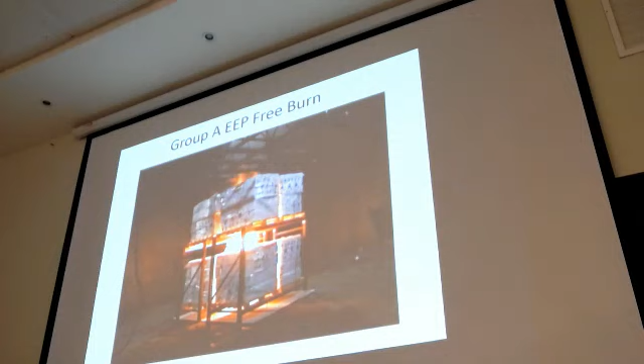We have no sprinkler discharge against this fire. It only takes a few moments before it's fully involved. These types of plastic are a petroleum product. It is virtually a solid gasoline, if you will, with an oxidizer in the foam cells to add to the combustion process.

Incendio grande, huh? No translation? Okay.

During the test process, they will spray water around the perimeter. You will see the floor being a little wet. This is just so we channel the heat up through the calorimeter and we don't get any heat escaping out of the sides of the test facility.

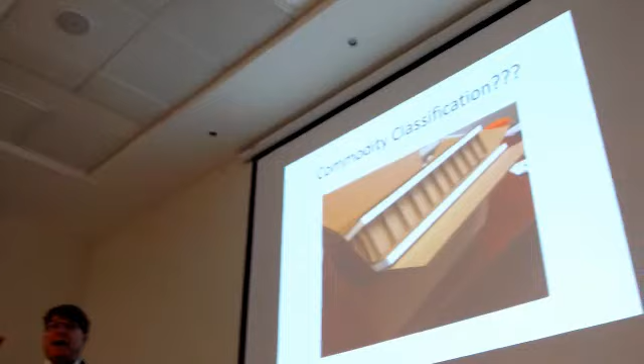Today, fire sprinklers with glass bulbs have an unexpanded plastic protective strap, and we ship them with this expanded polystyrene plate as a shock absorber to keep them safe. We manufacture very high quality sprinklers, but it doesn't do us any good if we can't get this quality validated product in our customers' hands in the same condition it leaves the factory.

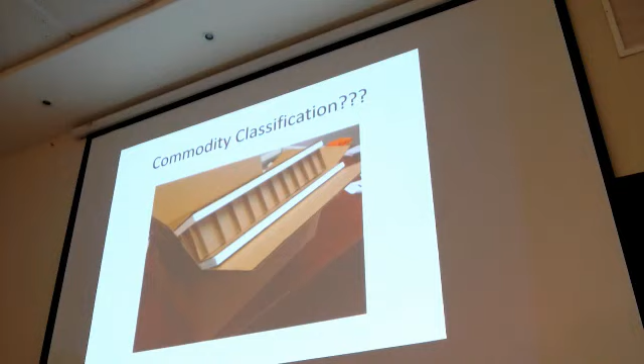So changing our packaging has changed our commodity classification. These polystyrene plates represent 14% by volume expanded plastic. So now a box of fire sprinklers is considered a cartoned unexpanded plastic. The same product inside, but the packaging has forced this. So we need to think of everything that's in the box, not just the product.

Changes in industrial practices occurred throughout the world after World War II. We began building buildings out of steel. Steel was stronger, lighter, more economical, and we could go taller with our buildings. We were allowed to begin using fork trucks to mechanically move pallets, and we could go much taller than with a human and a ladder. This added that vertical component.

But we didn't change our sprinkler systems, and this is what a fire looked like after we started doing this with a typical antiquated sprinkler system, a pipe schedule sprinkler system with half-inch sprinklers.

So in the 1950s, from these catastrophic losses, we began to develop direction to our sprinklers, a standard spray upright or a standard spray pendant. We also developed a sidewall, but it's the uprights and pendants direction that gave us better performance for protecting storage occupancies.

But still, in the 1950s, with this technology, our fire tests would open many more sprinklers than our water supply could handle. So again, we needed the next generation of improvement to our design, or a performance-based design.

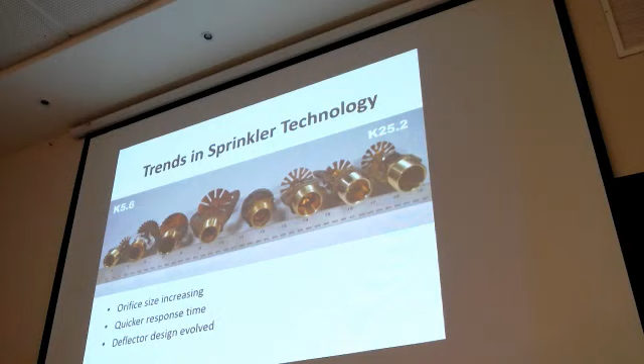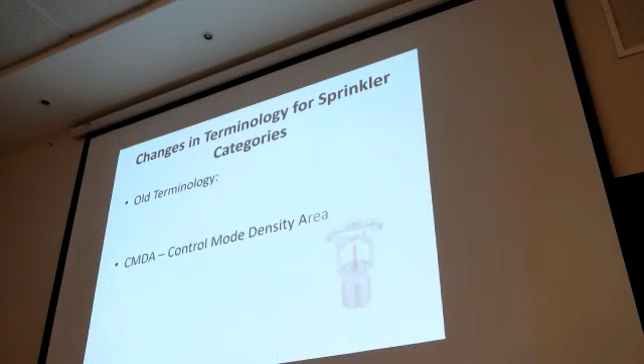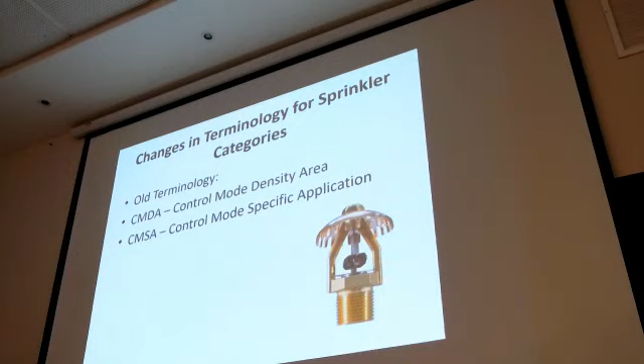So now we need an improvement in our terminology, or the names that we call sprinklers. We originally had the control mode density area from the 1960s, and we had control mode specific application, the first time we used a pressure and a number or quantity of sprinklers as our design criteria. And we have suppression mode sprinklers.

Now it's getting more complicated. You have a building with storage in it. Which one do you select? Which one do you choose?

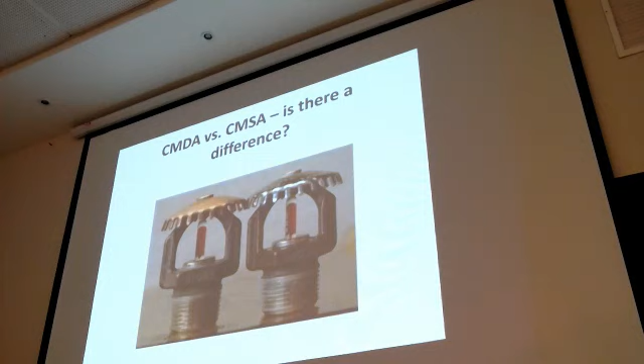So FM Global began doing research on the differences, or really the similarities between sprinklers. Are control mode density area sprinklers equivalent to a control mode specific application sprinkler if their properties or their attributes are identical? We can see by this photograph, the sprinkler on the left is control mode density area. It looks nearly identical to the control mode specific application sprinkler. The only difference is the chrome on the deflector, which is just there to identify the sprinkler as being special.

But because their K factors are the same, their temperatures are the same, the response time of the bulbs are the same, the deflectors are the same - it's those properties that define the performance characteristics of the sprinkler. If the properties are equivalent, the sprinklers are equivalent. This holds true if you are comparing a Tyco sprinkler to a Viking sprinkler to a Reliable sprinkler. If these properties or attributes are equivalent, then the sprinklers are equivalent in performance and can be used interchangeably.

So FM did a full-scale fire test comparison, 16 total tests, but 8 side-by-side comparisons, always with double row racks, class 2 to standard plastics, K11.2 upright, nominal 160, standard response. And at the end of the day, each one of these tests cost $100,000 plus - nearly $2 million was spent to determine this.

And the conclusion of the test is that they're equivalent for design purposes, provided that K factor, orientation, temperature, RTI or response time index, and the spacing of the sprinklers are identical. This was a quantum leap in moving our industry forward and innovating and simplifying how we do our designs for protecting storage. So now all these cumbersome names have just evolved into a sprinkler category called storage sprinklers.

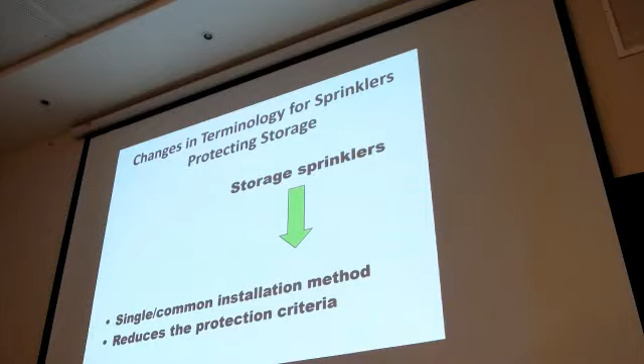Use a single common installation method, and it reduces the protection criteria, simplifies the design aspect for the engineer. The key attribute, like I said earlier, is to take the water from here and get it down to the floor against the products of combustion that are fighting us so hard in getting the water down where it needs to be. So the number one thing to look at is the K factor.

We have evolved from the half inch, 5.6, up to the 1 inch, 25.2. The response time index is extremely important. You can see here close-ups of a standard response link - very thick, it's heavy, it's got high thermal mass. Our quick response or fast response thermal element is very thin, has a very low thermal mass.

Same attributes occur with bulb sprinklers. This is the 3 millimeter diameter bulb on the left, 5 millimeter diameter bulb on the right. We have quick response on the left and standard response on the right.

So orientation is simple, things we've known for many years - pendant sprinklers and upright sprinklers. Pendant sprinklers have a slight advantage over upright sprinklers. If you look in the tables for upright ESFR, you see that sometimes their height is very limited. Where with a pendant sprinkler, we can go up to the very tall limits of ceiling-only protection.

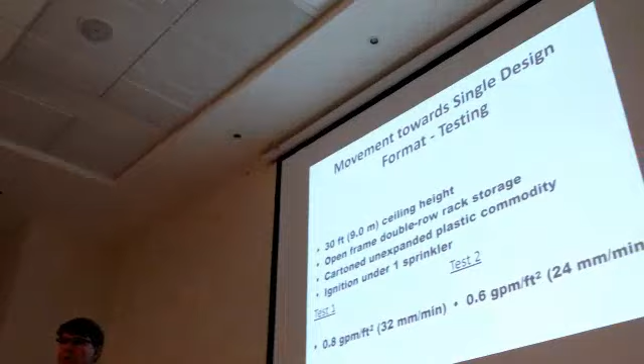So in test number 1, we deliver a 0.8 density. This is an enormous quantity of water. If we were to put a dam up at the spacing of this sprinkler, in 1 minute's time, the water on the floor would be well above our ankle, halfway up to our knee. A very large quantity of water.

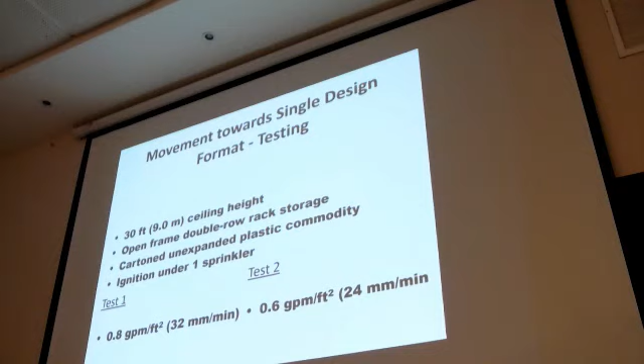Test number 2, with our new technology and new thought process of designing the droplet size, we will deliberately reduce the total water delivered by 25%, down to a 0.60 gallons per minute density. And we asked how many sprinklers will open in each fire. This is test number 1.

Please note, the igniters are being lit. This is an FM Global test. We have ignition. 8-foot aisle, 20 feet of storage, 30-foot ceiling height.

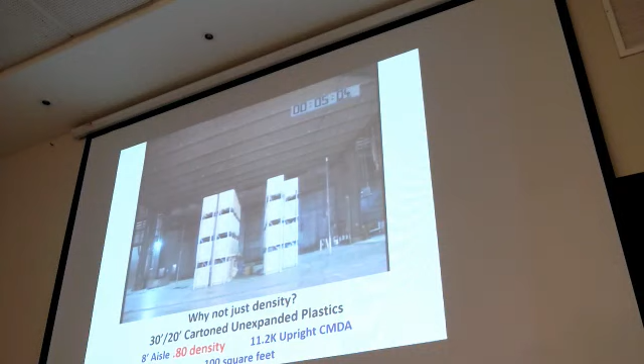105, flames starting to lick out into the east face, the main rack at the 3rd tier. 110, flames 7 to 8 feet above the top of the array.

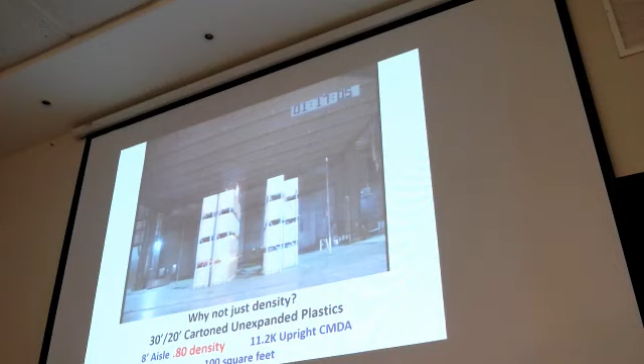1 minute 18 seconds, the first sprinkler is operated and flames are being driven back down to below the top of the third tier.

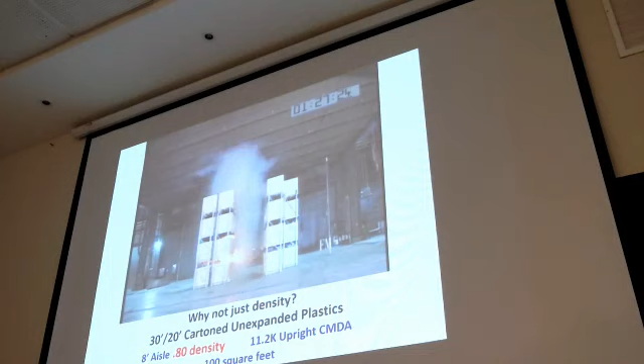1:30, flames on the east face primarily at the second and licking out at the third tier. Flames still appear to be driven back down into the lower tiers.

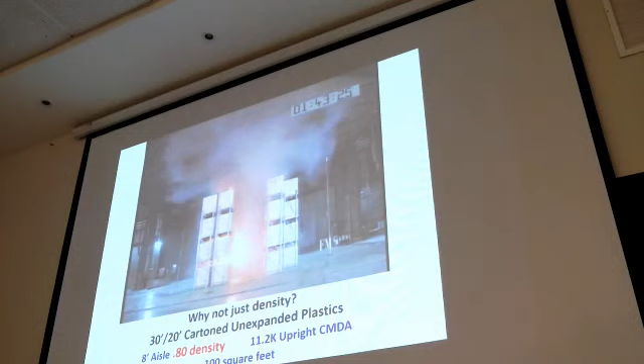1:45, flames have again reappeared above the top of the array, extending above the top of the top tier at least 5 to 6 feet.

The fire grows vertically against the spray discharge. We have one sprinkler over.

2 minutes, flames in the longitudinal flue ascend from the top of the bottom tier to well above the top of the array. Flames increasing on the east face of the main rack at the second, third, and partially spreading onto the top tier.

2:16, flames not yet licking out onto the west face of the main rack. They are increasing on the east face, and there's some smoking of the target at 2:25.

2 minutes 30 seconds, flames still extend at least 5 to 6 feet above the top of the array from the longitudinal flue and several feet from the east face.

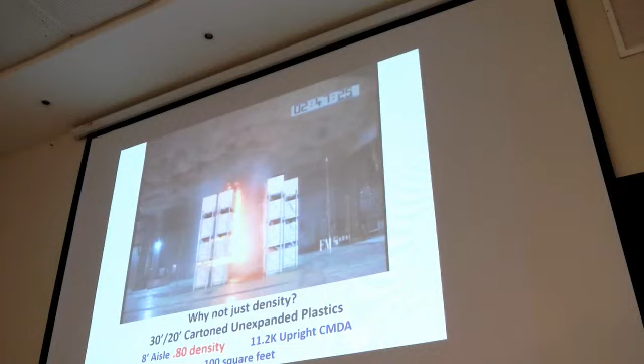2:45, flames just starting to look out onto the west face of the main rack, second and third tiers. 2:50.

Fire on the east face, partially covering the center 2 pallet loads at all tiers.

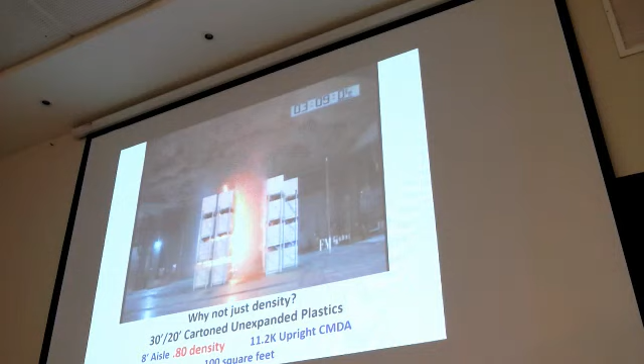3:10, increased smoking of the target. Still only one sprinkler operating after 2 minutes.

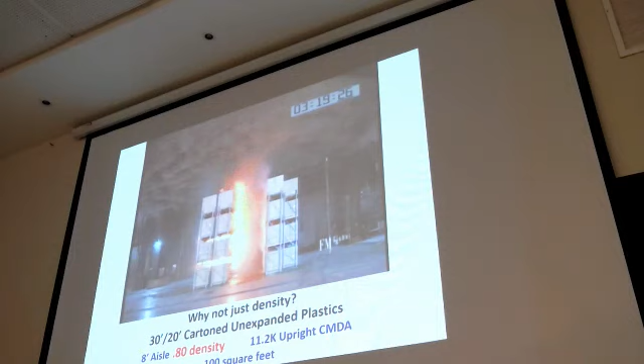3:20, fire continued to intensify, especially on the east face. And at 3:25, the second sprinkler operated to the east of that ignition. That sprinkler is 20 feet away from our fire.

Increased smoking of the first ring of the sprinklers' target, with water cooling those sprinklers.

3:35, ignition of the west target at the second tier, mushrooming. Flames have been intensifying on the west face and now extend from the top of the bottom tier to above the top of the array.

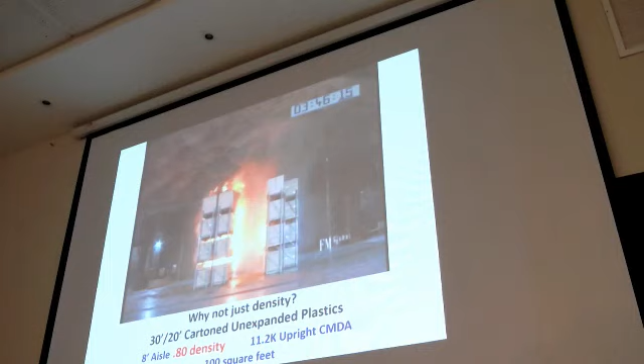3:43, another sprinkler operated, followed by another. 3:48, found that several more sprinklers are operating. Flames on both faces of the rack still extend above the top of the array.

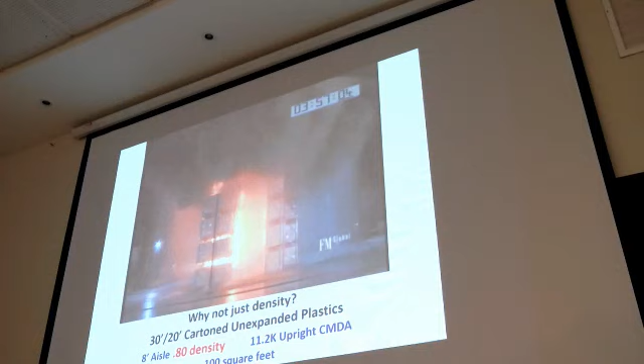Another sprinkler operated with ignition of the target at the third tier. However, the fires on the target are very light.

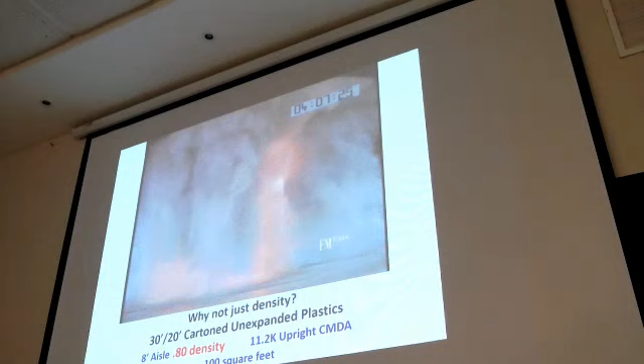Sounds like several more sprinklers just operated at 4 minutes, followed by 1 or 2 more. 4:07, much smoke being driven down to floor level, obscuring much of the fire room.

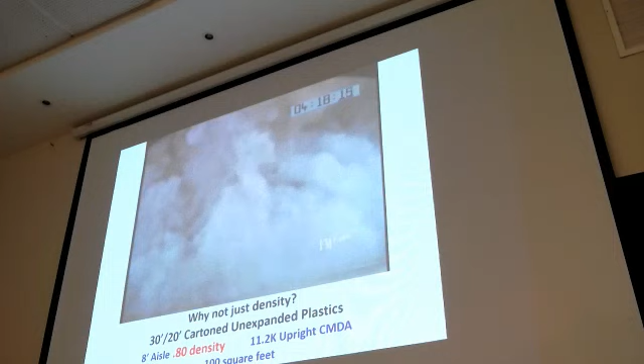4:15, control room reports 20 sprinklers operating. Okay, no more video because it is only smoke, no fire.

They run the test to the 5-minute mark, and at 5 minutes, 25 sprinklers are open, even though we only calculated 20 in our hydraulic design. So this is classified as a sprinkler failure. Even though the building did not burn down, it eventually controlled the fire.

But what we see is that the droplets from these K11.2 sprinklers were small, and the fire plume was carrying the water droplets away with the products of combustion. That spray discharge was landing on the first ring of sprinklers, cooling them, preventing them from operating, and helping to control the fire.

So test number 2, same storage, same ceiling. We've made the test more difficult with a 4-foot aisle. We've reduced our density by 25%, but we are using new technology here.

These are the sprinklers that are located in the new Chapter 21 of the NFPA 13 standard. They are extended coverage storage sprinklers, fast responding element, with a K factor of 25.2.

And they are extended coverage, so they are further apart, which makes it more difficult for the water mist or the small droplets to be carried away and land on an adjacent sprinkler.

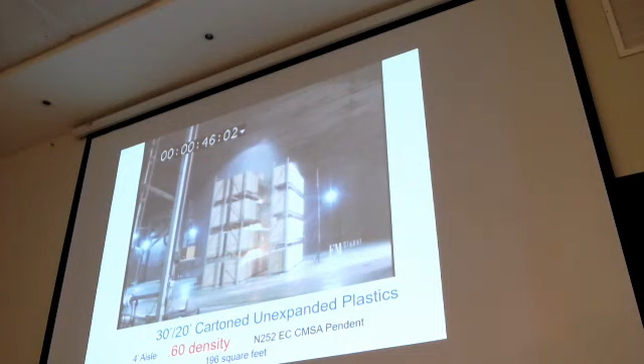Flames are beginning to spread laterally, and activation of the first sprinkler at 31 and a half seconds, the same time as test number 1. It's due to the quick responding. Flame heights are about 23 feet in total height. We're at 48 seconds now. Flames have been driven downward slightly. Notice the large droplets of water.

We're at 55 seconds, and small flamelets are emerging out of the ignition flue on the eastern face of the main array. Flames are being driven down further. We're at 1 minute, 5 seconds.

At 1 minute and 15 seconds, it appears as though the fire is contained to the first 2 tiers of the main array in the ignition region. At 1 minute, 25 seconds, there's a very light gray, whitish colored smoke emanating from the fire area.

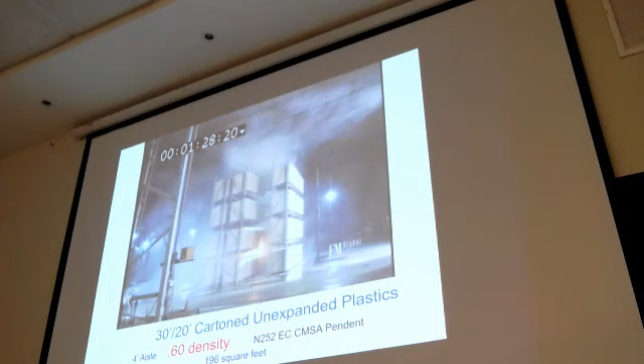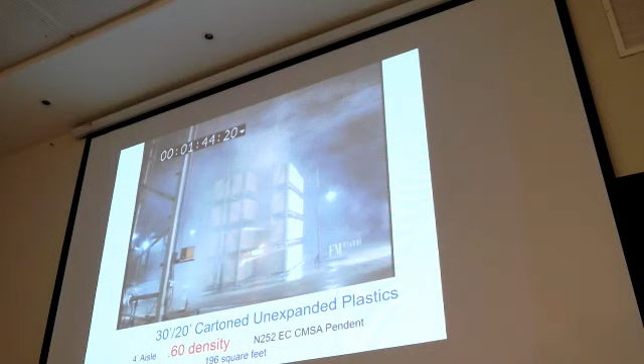You've had sprinkler discharge for 1 minute and the fire is virtually contained. This is the point when the water flow switch contacts close. This is where we get our first alarm. And the fire event is nearly over.

1 minute, 55 seconds. The fire continues to be contained within the first 2 tiers of the main array. Two minutes and 20 seconds, and a light gray, white haze is engulfing the array area of the test pad. No flames are visible at this point. We're now at 2 minutes and 35 seconds.

Three minutes and 50 seconds. Smoke continues to be generated, indicating that there is indeed a fire there, and it is possible to see small flamelets about 1 foot in height emanating from the top of that first tier commodity. At 5 minutes, the test is terminated. Hose streams are applied.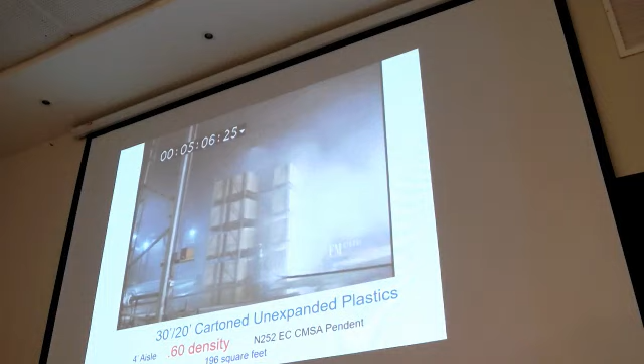So much different results with test number 2. Only 1 sprinkler open can nearly extinguish the fire. The fire that was still there after 5 minutes, the fireman could come in and literally pat out with his glove. He wouldn't need more water. It was hidden underneath one of the pallets and couldn't get water spray on it. But remarkably different performance in the 2 different styles of sprinklers.

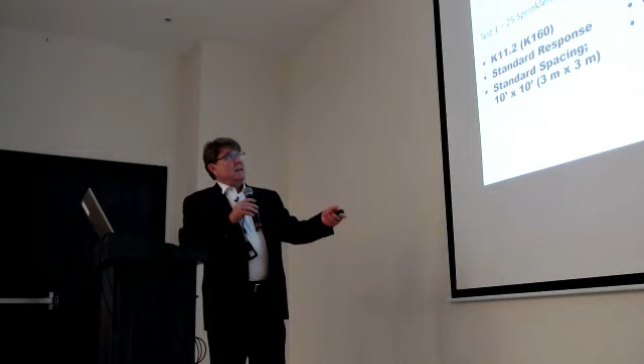Since FM Global is primarily an insurance company, they're very interested in calculating the loss in dollars of these 2 fires. The first fire sprinkler system test opened 25 sprinklers, K11.2, standard response, standard spacing. Test number 2 opened 1 sprinkler, which is pendant, K25.2 EC, quick response element at 14 by 14 spacing. The loss calculated for the first fire was $6.25 million US. The loss for the second fire was calculated at $1.5 million US. Remarkably different.

It's that kind of performance from the fire test that inspired the NFPA 13 committee to adopt this new science and this standard. We must spend a lot of money, do a lot of testing. That's where Chapter 21 came from.

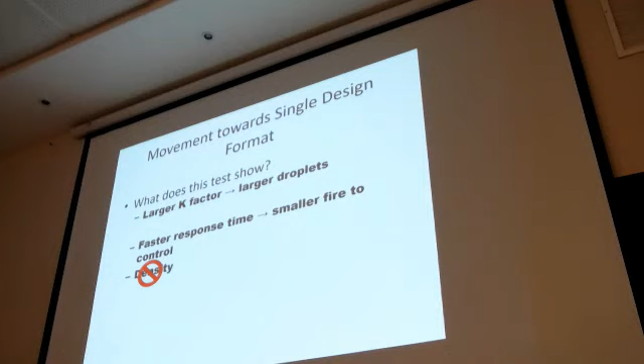So the test shows that the larger K factor delivers the larger droplets. K factor and droplet size are directly proportional. Faster response time means that there's smaller fire to control. But density does not mean what we thought it did. For 50 years we've been using density. My whole career, I'm trained on density. Now I'm an old dog, and I must learn new tricks for the future.

So this is an example of a data sheet from FM Global Tables 8-9. And you can see they list the commodity, they list the building height, and they give the best choices in green. These are the choices that have the best performance with the smallest amount of hose streams and the smallest duration of the water supply. All of these have been tested. Unlike our densities, where we only tested a few and we extrapolated data, each and every one of these was tested by FM. So this is real 21st century science in our fire protection industry, something that we didn't see in the 1960s or in the 1970s.

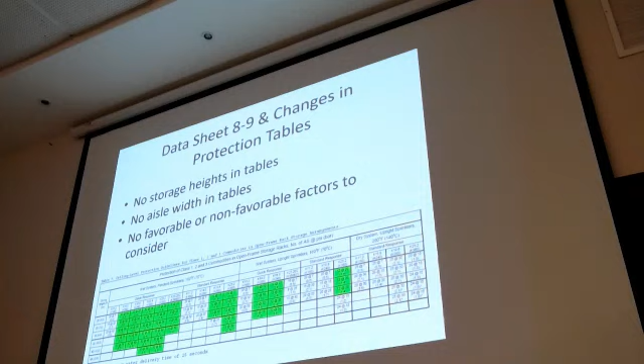So no storage heights, no aisle widths, everything is based on 4-foot aisle. The future is having robots pick things and put them away so that aisles get more narrow. There's no favorable or non-favorable conditions to put in our design. The number of sprinklers in the design criteria leads to less hose stream and less water supply duration. We see this here. This is the ESFR criteria, up to 12 design sprinklers, 250 GPM hose, 60-minute duration. We also are allowed to eliminate the smoke vents at the ceiling.

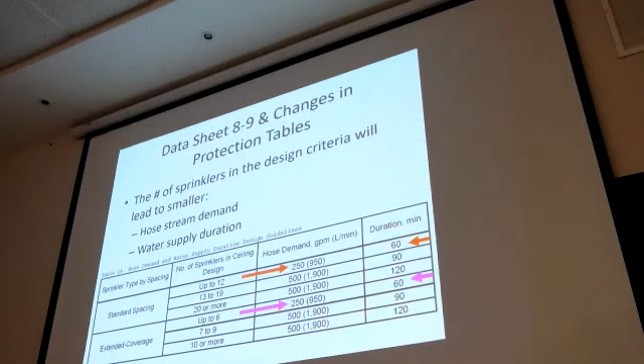So with the extended coverage sprinklers, with up to 6 sprinklers in our design criteria, again, 250 GPM hose, 60-minute duration. This dramatically reduces the quantity of water required to protect these storage occupancies.

So our future vision for data sheet 8-9: eliminate the 10-foot limitation on storage above the highest level of in-racks. We're going to do research where a level of in-rack is a virtual floor, and each level of in-rack has to do the heavy lifting of fire protection, and the ceiling will only protect what's above that highest level.

Establish new in-rack protection schemes based on the K factor and the available pressure. Eliminate the requirement to balance ceiling and in-rack demands together. This will dramatically reduce our water demand. It will be either or—ceiling sprinklers doing the work, or the in-rack sprinklers doing the work.

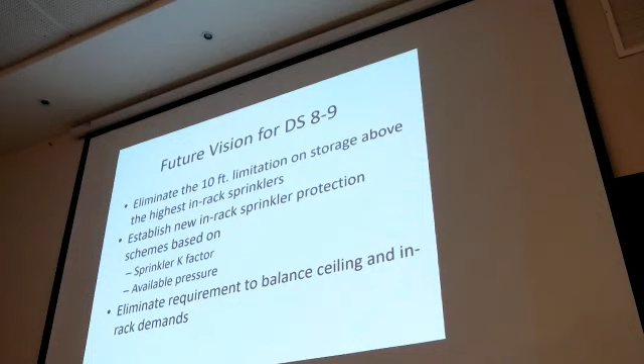Compared to previous standards, the new technology and design philosophy will lead to a lower number of sprinklers in the design requirements. Saves water, saves money, smaller pipe size. Lower hose demands, lower duration demands.

Extended coverage sprinklers will lead to generally fewer sprinklers being installed, fewer branch lines, less overall piping, fewer connections, less installation labor. Very cost-effective solution.

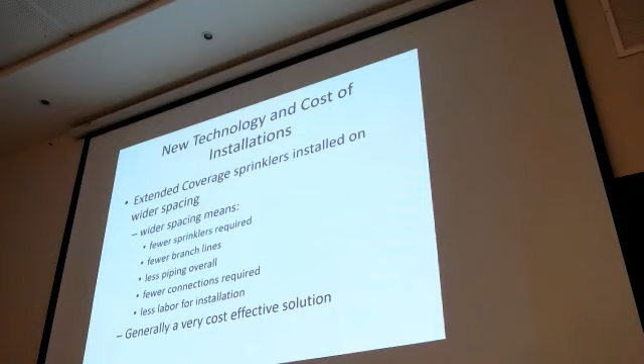Once again, it's our industry being friendly to the construction industry. If we, as fire sprinkler manufacturers and installers, can keep our costs very consistent per square foot, the construction industry will be very friendly to us in return for doing such a good job, and we will see more and more buildings in the future equipped with fire sprinkler systems.

We have a vision that the best years of the fire sprinkler industry are still in front of us, not behind us, because of this innovative technology that keeps costs under control for the developer, the end user, the owner of the building, and does a better job of putting the fire out, keeps his insurance costs down.

So through these changes, NFPA, FM Global, and Reliable are poised to provide the industry the most effective protection options that are simple and cheap and a more sustainable choice. This is important in the future. They're going to do a better job and save water.

So what else is new? We talked about our history of where we came through to chapter 21. But what is this next generation? What does this future vision look like?

So we have a glimpse of what the 2019 edition of NFPA 13 will look like. It will include something called Option 3, Chapter 25.8.3. This will include new, or the next generation of, in-rack sprinklers.

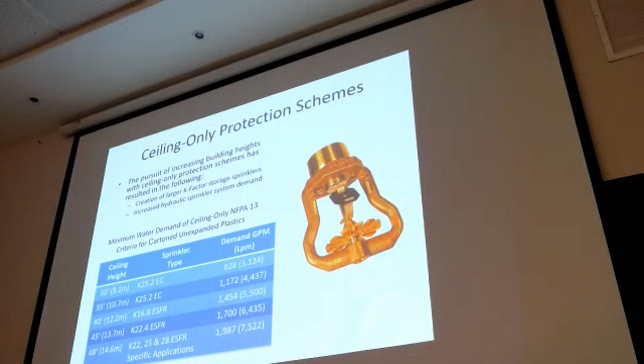But again, we look at our history. We see where we've come from with ceiling only. From 30 feet or 9.1 meters, we use a Chapter 21 sprinkler and have an 830 gallon per minute demand. And we can go all the way up to 48 feet of ceiling height with the K22, K25, or K28 ESFR, but we need nearly 2,000 gallons per minute to protect these buildings. So we're capable, but at what cost from the water supply?

So there are three driving factors to return us to in-rack sprinklers. 30 years ago, FM Global tried to eliminate in-rack sprinklers with ceiling only. They invented the ESFR. FM Global was having more loss as an insurance company from water damage than they were from fire damage. So it's a natural progression to invent something that got rid of the water damage.

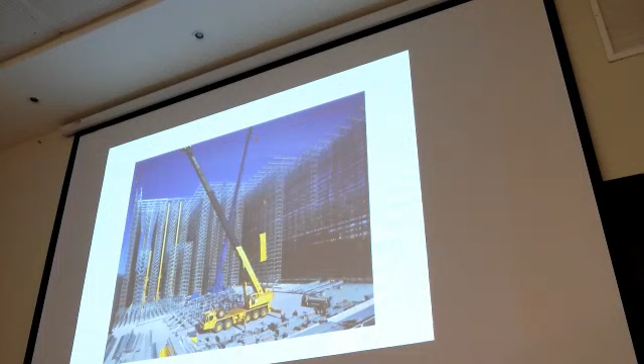But are they coming back? This is a good example of the effect e-commerce has on our society. Has anyone purchased anything online from the world's largest online retailer and had it delivered to your home? Very convenient. This is what a fulfillment center looks like.

It's called a rack-supported structure. There is no building—the racks are the building, and they just put the skin on the exterior of the rack. These are 120 feet tall. So it forces us into in-rack sprinklers. We can't do it from the ceiling only.

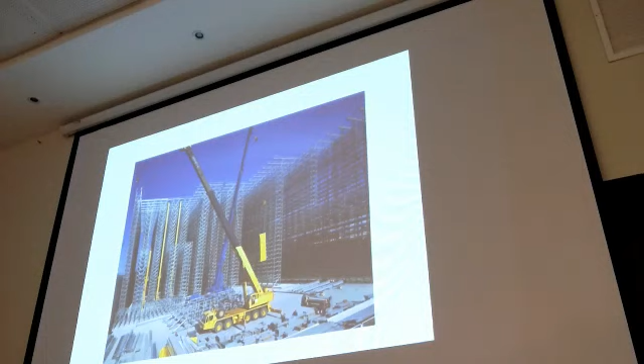These fulfillment centers have robots that put the product away and retrieve the product, and robots don't break in-rack sprinklers. So that is an advantage that allows us to go back to in-racks. Number two, it's a more volatile world that we live in, with the polyurethane furniture, the aerosols, the polystyrene plastics for packaging, tires.

So methods of storage, closer together, and the commodity are forcing us with higher challenge fires to change our approach to protecting these. I was involved in a project a few years ago.

Storage of automobile parts. I grew up in a time in America where automobiles had chrome bumpers, steel bumpers, and they were shiny and they sounded good and they were hot rods. Today, parts for automobiles, body parts, bumpers for Toyota, Honda, Subaru, Kia, all the cars we see with the low impact collision rating, are made from expanded polystyrene with a vinyl clad to get the color.

And they are stored very tall in buildings. The robots will grab the red bumper or the white bumper, the front bumper, the rear bumper for the automobile repair shop. This is storage of exposed, expanded plastics. They don't even put them in cardboard cartons. They're in a plastic sack with a barcode so the robot can read which bumper it is. Car bumpers. Who would have thought?

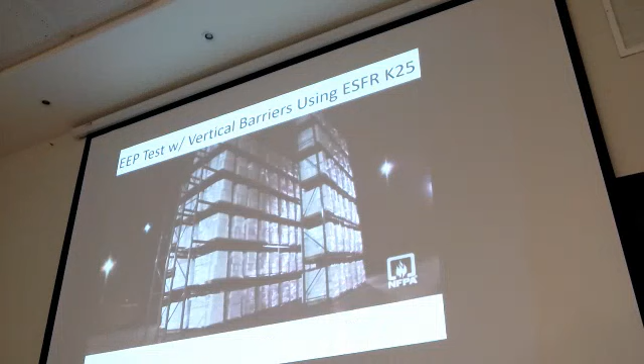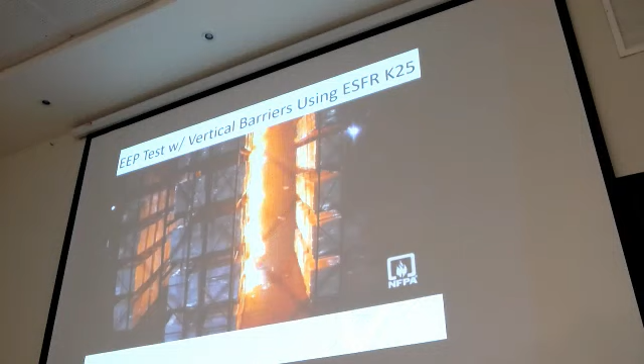So here's test number 8 of exposed expanded plastics at UL Laboratories. We have vertical barriers at 16 feet on center using K25 ESFR. It's a very bad fire. See the oxidizers pushing the commodity out. First sprinklers open here and just make the fire angry, force it out the other side of the rack.

So at the end of this test, 8 sprinklers were open. That gives us our 12 sprinkler hydraulic demand. There's always a 50% safety factor from the number of sprinklers we open. It took 8 tests to collect enough data to only have 3 successful tests. Many of the tests opened 12, 15, 20 sprinklers.

So at the end of the day, the 2016 edition of the NFPA 13 now has criteria to protect exposed expanded plastic with vertical barriers, but we're limited to 40 feet, 12.2 meters, 35 feet of storage, the K25 ESFR, 60 PSI start pressure. We now need 2,600 gallons per minute. We can do it, but again, at what cost? A very large quantity of water to protect us.

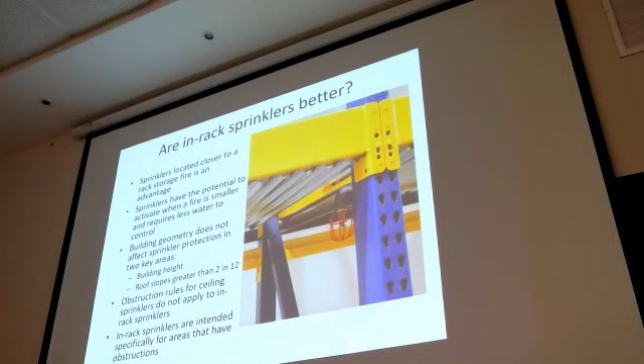FM Global has known this for many years. They have a scheme called 8-9A. They think they can protect anything with this, and they virtually can. They have levels of in-rack sprinklers at every 10 feet, 10 feet, 20 feet, 30 feet. They have longitudinal flue space sprinklers, transverse flue space sprinklers, and sprinklers at the face.

So you will see a fulfillment center, very, very tall. We'll have 1,000 or 1,200 sprinklers at the ceiling and 10 to 12,000 sprinklers in the rack. So we can do it. But again, at what cost?

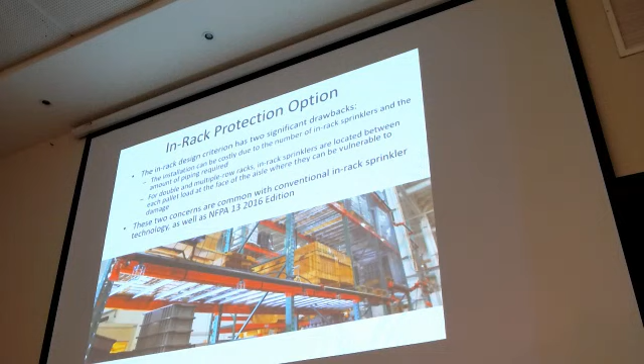So when we look at this, we see the face sprinklers. They do a very good job. They're very expensive to install, but they also provide many, many targets for the loading and offloading of the storage in the racks. So we wanted to explore the opportunities of what the next generation of in-rack sprinkler may look like.

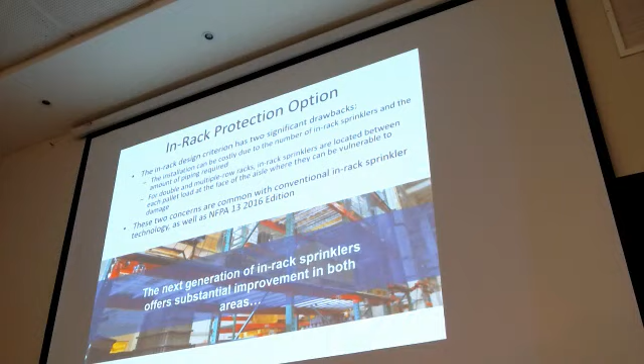And it looks exactly like our Chapter 21 ceiling sprinkler. So we are taking existing product that we know works very well, and we are testing new applications for existing product. So you don't have to buy another sprinkler. We don't have to make another sprinkler. We just have new applications for existing sprinklers that we already have.

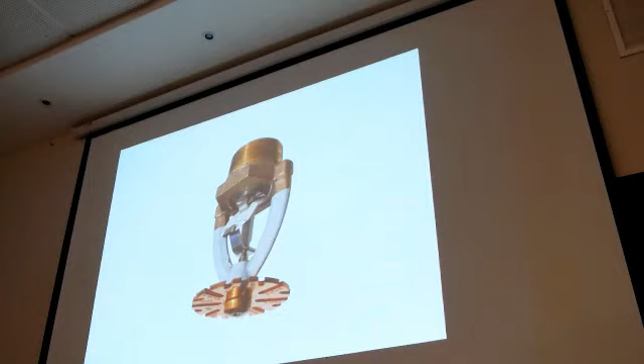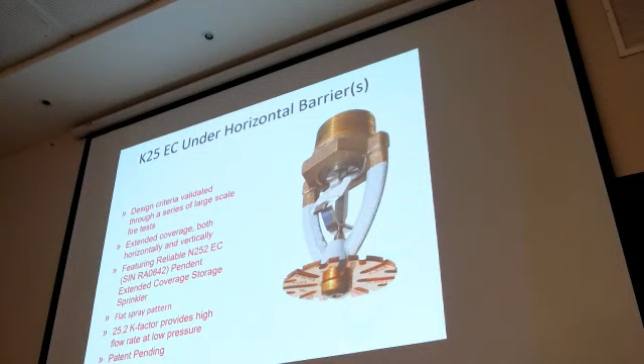So it is a K25 extended coverage quick response sprinkler. It's a very flat spray pattern, and we're using it under a horizontal barrier. This horizontal barrier is not a fire barrier, it's just a heat collector to speed up the operation of the fire sprinklers. The extended coverage, or the very flat spray pattern that this deflector gives us, allows us to get very close from the sprinkler deflector to the top of the storage. And the water droplets still spray wide and far and are very large with a lot of momentum.

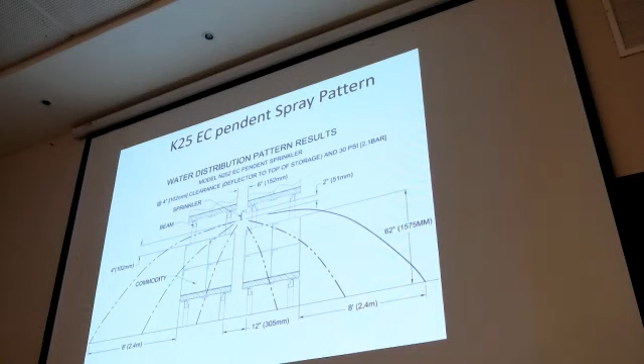And we'll see in a few moments a fire test where we actually see the water cascading all sides of the storage, so it does a very good job of wetting our commodity and preventing the horizontal spread of the fire. We've done 8 fire tests - I think now today we have 10 or 11 fire tests with this product. But we have 2 advances, one for exposed expanded plastics and one for carton unexpanded plastics.

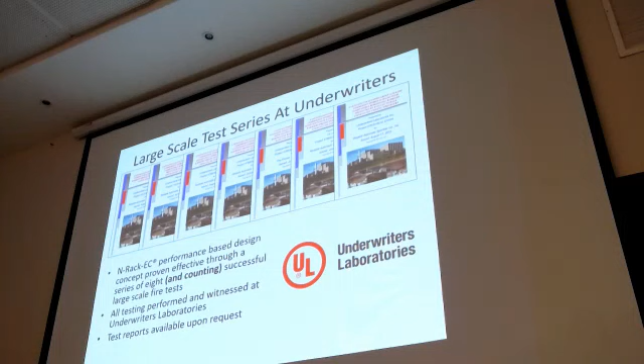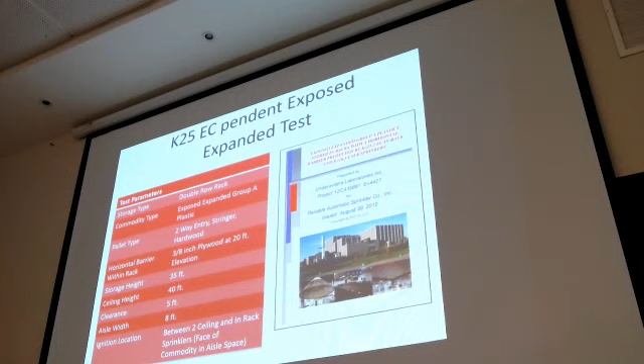So we will look at the exposed expanded test first, because simultaneously the Fire Protection Research Foundation was doing their K25 ESFR testing while we were doing this testing. So we picked a 40-foot ceiling height, 35 feet of storage. We used a K17 ceiling sprinkler. We made the assumption that there are many existing buildings in the world that are 40 feet tall that already have K17 ESFR fire sprinklers in them.

So what if an owner or developer wanted to move a commodity into this building that cannot be protected with K17 ESFR? Would they need to take the entire sprinkler system out, remove and improve their water supply, their pump, their tank, put in K25 ESFRs? Or is there something that we can do, like Home Depot, and just put in-rack sprinklers where they're needed? Have the in-rack sprinklers do the heavy lifting of the fire protection. The problem is solved, and we can salvage everything that we have at the roof. Again, being very friendly to the construction industry and the developers and the building owners from a cost standpoint, solving a problem and not having to spend enormous quantities to do it.

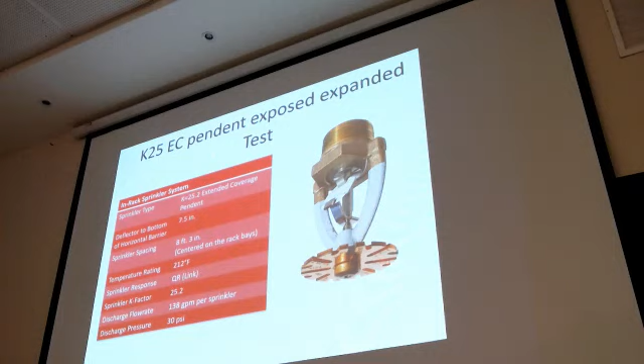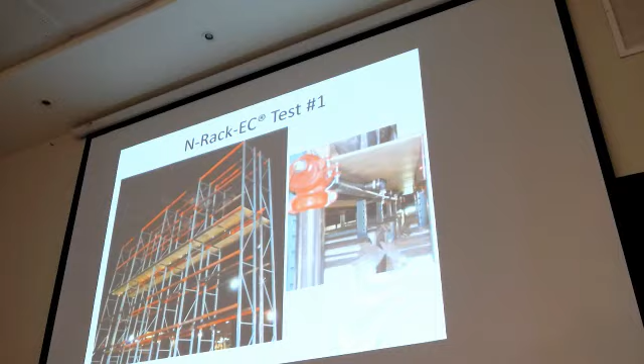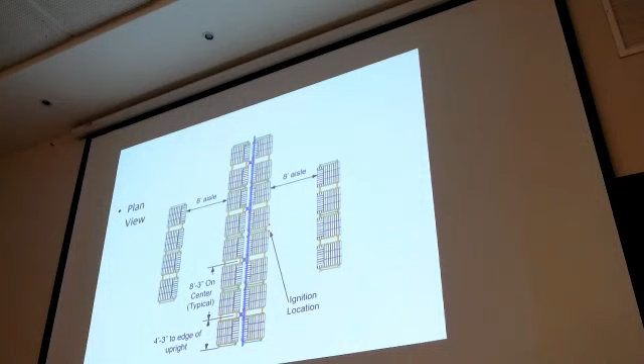This is the plan view from the test report, looking down from above. You can see our sprinklers are centered between the 4 pallets. We have the igniter on the face of the storage. We have an 8-foot aisle to the target array. Again, looking down the longitudinal flue space, here's our horizontal barrier, here's our sprinkler with about 8 inches of separation from the top of the storage.

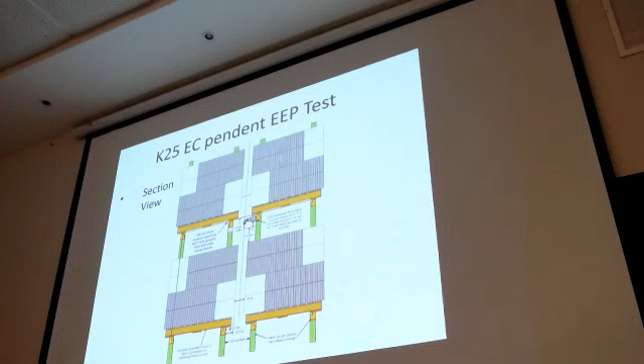This is the elevation view. So we see our sprinklers installed 20 feet above the floor. Now our ceiling sprinklers only have to protect 15 feet of storage. So we have taken the volatility of this project, put a virtual floor in of protection, and reduced the required job that the ceiling sprinklers have to do - virtually cut the problem in half. Here is our friend, the exposed expanded polystyrene meat tray.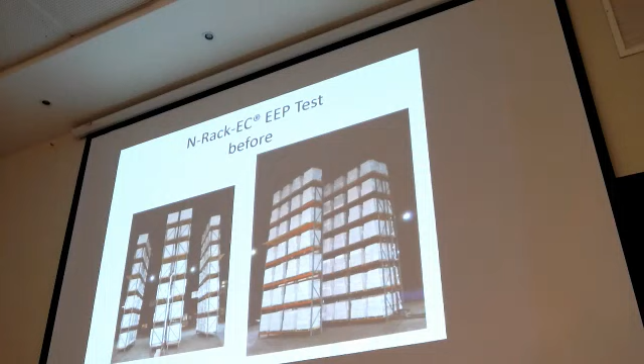Here's the video of this test number 1 at UL. Underwriter Laboratory is very good at running fire tests, but not so good at making video. So forgive the motion of the camera towards the end of the test.

UL starts the fire, has the igniter at the face in hopes that the fire will stay on the face and go past our horizontal barrier, and they will make us fail. That's why they are so good at running tests. We see time and time again the fire climb the vertical face of the storage in about 45 seconds, over and over and over. Very repeatable process.

Here's our horizontal barrier. We're beginning to see the T formation. Sprinklers are holding.

In a very small amount of time, the water spray from the discharge of the sprinklers pushes this fire down to the first level. Only 2 sprinklers are open.

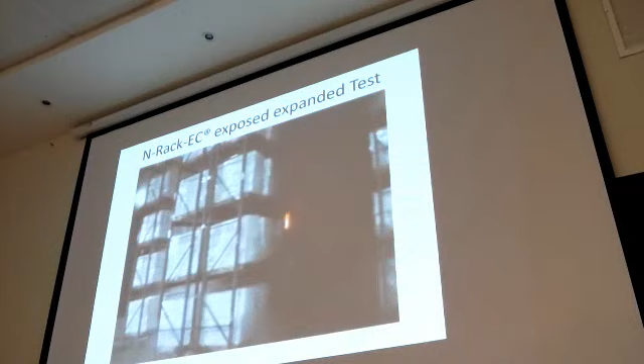So after 1 minute of spray discharge, this is when the water flow switch, the contacts close and sends the first alarm. As you can see, at the 1 minute point, the fire is virtually over. It's well contained. This is a wildly successful fire test and gives us more money to do future testing.

Here's a photograph after the test. You can see that the fire was well contained within the 2 uprights, or where our 2 sprinklers operated. Notice we cannot see through the rack. So much commodity is left. That's very important when we're evaluating the performance of this system.

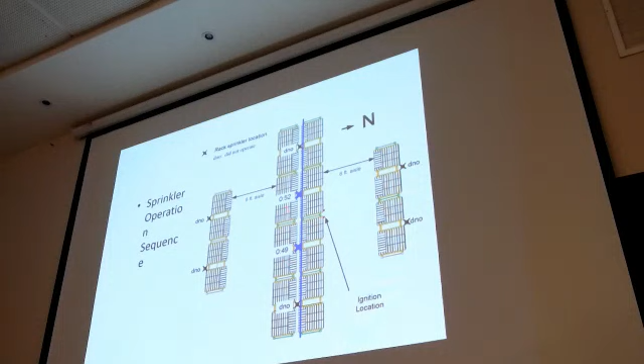So our first sprinkler operated at 49 seconds. Here's our igniter. The second sprinkler operated at 52 seconds.

So we need to use a metric or a scale to measure our success. And we chose to use the same scale that Underwriter Laboratory uses to list or approve any sprinkler that we would go to their laboratory for.

We wanted to make sure there was no sustained combustion at the outer edges of the target array. The fire did not jump to the target at all. No sustained combustion at the far end of the racks. You can see that the loss of commodity was very well contained where the sprinklers operated. No sprinkler should open outside the fire area. It's very well contained with 2 sprinklers.

We are allowed to have a 1 minute average ceiling temperature of 1,000 degrees Fahrenheit. Our actual measurement was 102 degrees. So it was very successful, which allowed us to get more money from El Jefe and go and test carton

unexpanded plastics. We wanted to challenge ourselves and make the test more difficult. We raised the ceiling to 48 feet, and we raised the horizontal barrier from 20 feet to 30 feet to have it more difficult and to have it delay the operation of the sprinklers.

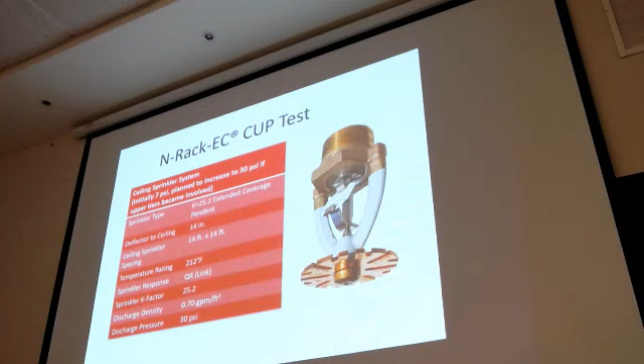We wanted to test the capability of the N252 EC sprinkler, so we installed these at the ceiling. Remember, the ceiling sprinklers only need to protect the storage that's above the horizontal barrier, and we only have 13 feet of storage above that barrier.

We use the same sprinkler in the rack, so this makes the fire sprinkler product very versatile. It can be installed in the ceiling and at the rack. One box of sprinklers in both locations.

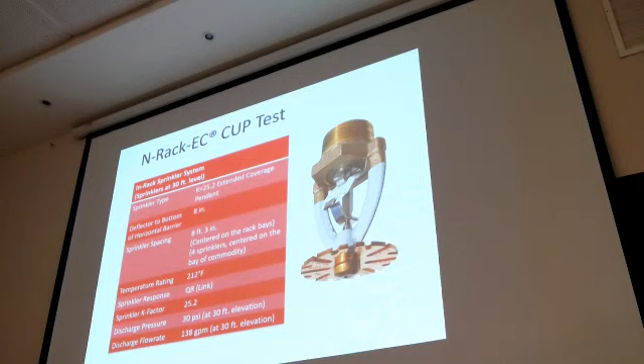Here's a view down the longitudinal flue space. You can see our horizontal barrier. You can see we changed the color of our commodity to represent the corrugated cardboard carton. We've made the test more difficult again with a 4-foot aisle width, making it easier to jump the aisle.

These are our sprinklers, once again, centered between the storage between the uprights. Again, looking down the longitudinal flue space, our deflector is very close to the top of the storage.

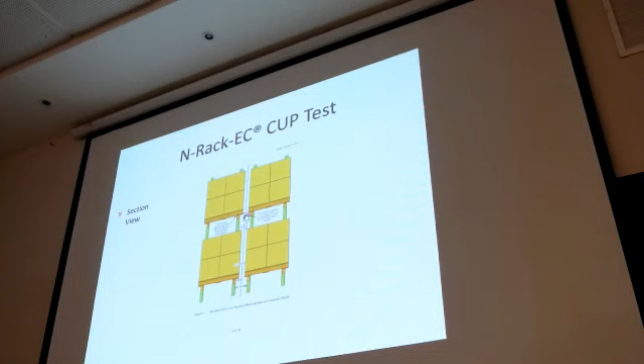Here's the elevation view. You can see we moved the barrier to 30 feet, 48-foot ceiling. We only have 13 feet of storage above the horizontal barrier.

In one of the tests, we relocated the igniter from the transverse flue space to the face of the storage. Again, Underwriter Laboratory is trying to get the fire to stay on the face of the commodity, not go under the horizontal barrier. They're trying to get us to fail. We need several test points and successful tests at each location in order to get a listing for the product.

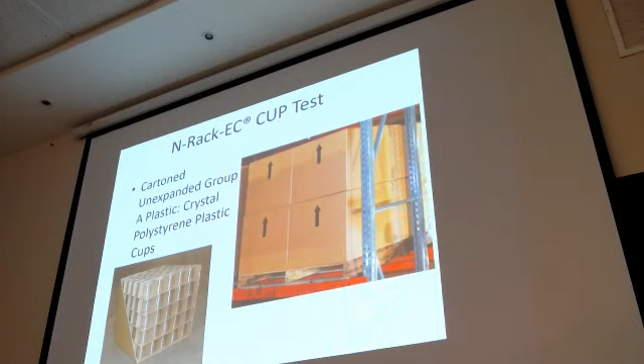This is our commodity, the crystal polystyrene cocktail glass, upside down in divided corrugated cartons on wood pallets. Here's a photograph of the racks fully loaded. You can see our horizontal barrier, our target array.

This is our carton unexpanded plastic video. We have a picture-in-picture at the 30-foot elevation, so we can actually see the spray discharge from the sprinklers when they operate.

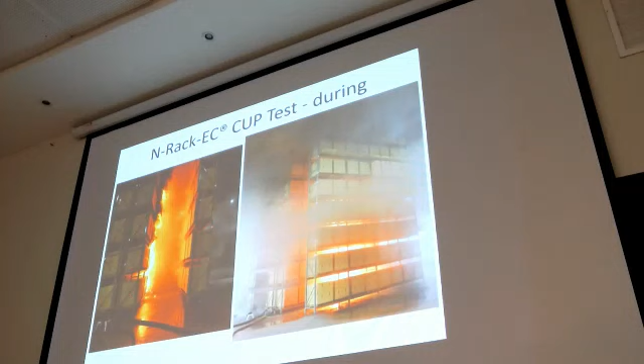Here's the still photograph during the fire test from 2 views. Here's a photograph of the elevation after the fire test. You can see we've lost some commodity, but it's only half as wide as the previous test.

So there's still a very minimum loss of commodity during this test. The fire is very well contained.

Please note that we had no charring to the edges of the uprights of the racks where the sprinklers were operating. This shows the wonderful mechanism that is provided to us as fire protection, fire sprinkler people, by corrugated cardboard packaging. This cardboard soaks up the water droplets and stops the horizontal spread of fire. So it's a wonderful mechanism of suppression and control.

So when we see customers take their products, like car bumpers, out of a corrugated cardboard box and put it in a plastic bag, they have unwittingly changed their commodity classification from a carton commodity to something much more volatile with an exposed expanded plastic. We see this all the time.

At IKEA, you go to buy the furniture that you put together yourself, the bookcases and things. Years ago, when my daughter went to university, we bought furniture for her dormitory room, and everything came in a corrugated cardboard box. Now today, you go to buy the same furniture at IKEA, and you pick the items.

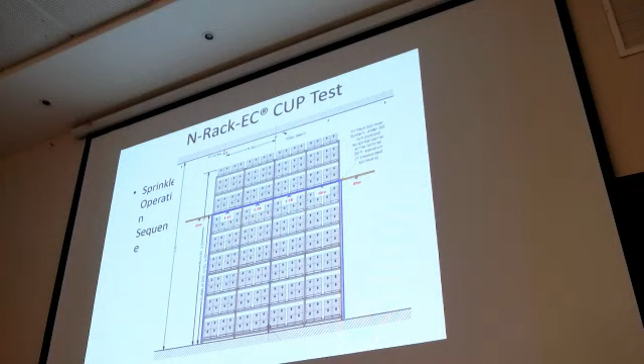Solder element sprinklers are much faster than glass bulb element sprinklers. However, the glass bulb sprinklers have a very narrow band of operation, a very small standard deviation from minimum to maximum temperature where they operate. Links are faster, but they have a broader range of when they will operate at what temperature.

So this sprinkler here was just simply a slightly faster sprinkler. It had less solder permeation between the 2 plates that hold it together, by a percent or 2 less area than these 2 sprinklers.

So they all operate with the same response time index, and we're allowed this range or deviation from when they actually operate. As such, the standard committee requires us to have a safety factor because we opened an extra sprinkler. So we calculate 4 sprinklers in our hydraulic component area for this N-Rack-EC system.

When we look at our performance criteria compared to UL standard, again, we did not jump to the target, even though it was only 4 feet away. We had no sustained combustion to the end of the racks.

It was very well contained vertically. No sprinkler should operate at the outer edges. We had 1, but that was an anomaly.

Our maximum 1-minute average steel temperature, again, we were allowed 1,000 degrees. We were actually measured at 82 degrees Fahrenheit. So again, a wildly successful test.

We've had more than 3 in each of these categories to submit to the committee for consideration, and it is now included in the 2019 edition. The 2019 edition will be published this September, but you can begin using it now under the new technology clause that's in the standard.